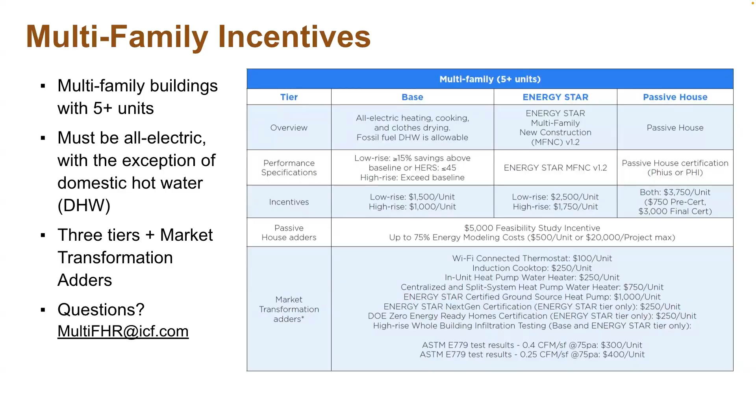So I couldn't be more excited about tonight's presentation. I've seen another version of it, so I know how powerful and thought-provoking it is, and that's why we're so excited to get it here at PH Mass as well. And I just wanted to say, I've been in PH Mass now for about 1.5 years, and it has been one of the pleasures of that work to work with Paul, to work with Ian, and the whole energy efficiency team at DOER. Sometimes I think bureaucrats can get a bad rap, and not always undeserved, right? But I think this team, DOER, the energy efficiency team in particular, is really defying those stereotypes.

There's a really forward-thinking spirit that is not just trying to make marginal gains in energy efficiency, but is thinking seriously about how we create a more affordable, more competitive Commonwealth. And I think you're going to see a great example of that tonight. I think that the work that Paul is presenting is really the start of an important shift in how we think about the value that Passive House and high performance building delivers, going beyond just the benefits to the occupants and thinking about the value that Passive House provides to developers, to utilities, to all ratepayers, to anyone interested in buying or renting a home, to everybody.

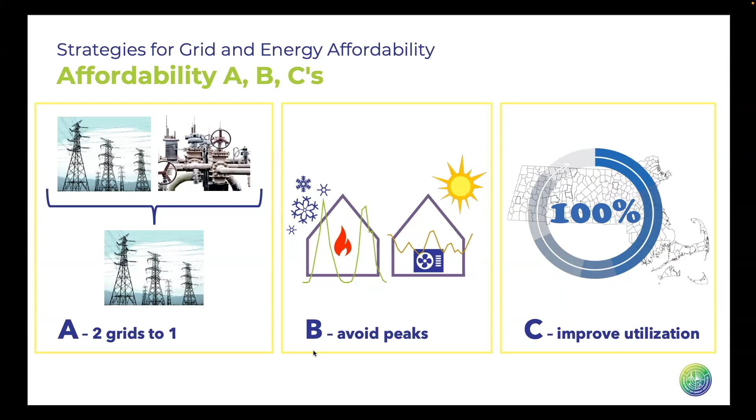So the kind of things it takes to make our grid more affordable, our energy more affordable, are really the ABCs. To go from 2 grids to 1 will make things more affordable. To avoid peaks in our grid, that will make things more affordable, and lower energy costs and to improve utilization. So about 60% of our energy cost is the cost of the wires and the cost of the pipes. So everything that you hear tonight would still make sense, even if our energy supply was free. So the key to affordability is not necessarily just more supply. It's these three things to make the cost of pipes and the cost of wires go down.

So passive house is a critical element to unlocking a better strategy for those ABCs. So I'd like to just take a moment and take a look at where Massachusetts stands in terms of passive house adoption and in terms of electrification.

So we have a terrific program in Massachusetts called MEPA. And the reason this is so useful to look at is because these are projects that are being permitted today. It captures many medium and large size projects in the state of Massachusetts, so it represents a really good sample. But also these are projects that are going to be built in 2 to 5 years, sometimes 10 years.

So when we look at what's being permitted through MEPA and the commitments being made as part of the MEPA process for these planned projects, we can get a good sense of what's coming, what's in the pipeline. So it's a forward-looking process. So we took a look back as far as 2020 so far. We're taking us back to 2018 right now.

And we found that passive house adoption in Massachusetts in our leading indicator with MEPA is just unbelievably strong, and it's accelerating. So as of end of 2025, so we're already 6 months into 2026, we had almost 20,000 multifamily passive house units committed through the MEPA process.

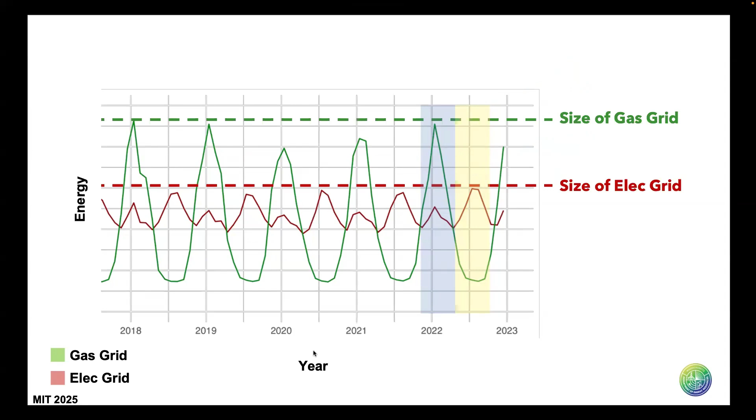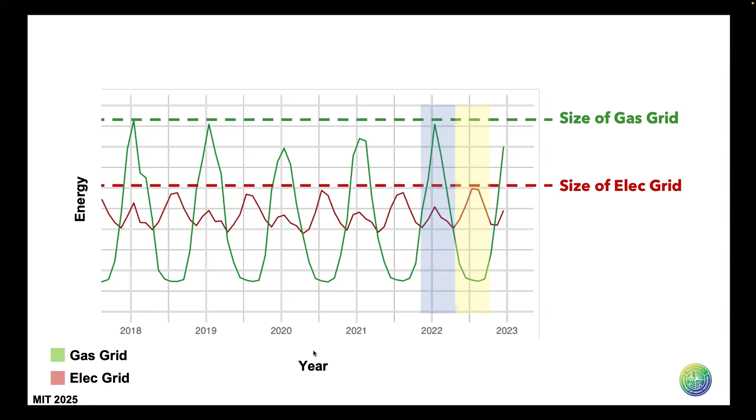And whether you're doing this at the national scale, a state scale, a regional scale, municipal scale, it is generally the case that the peak load that you experience in the winter there, that's the size of the gas grid in whatever sample size you're looking at. And the peak load in the summer for the electric grid is about the size of the electric grid in whatever sample you're looking at, again, whether it's nation, state, or city. So just isolating now 1 year and getting rid of those other multiple years. So just pay attention to those 3 points.

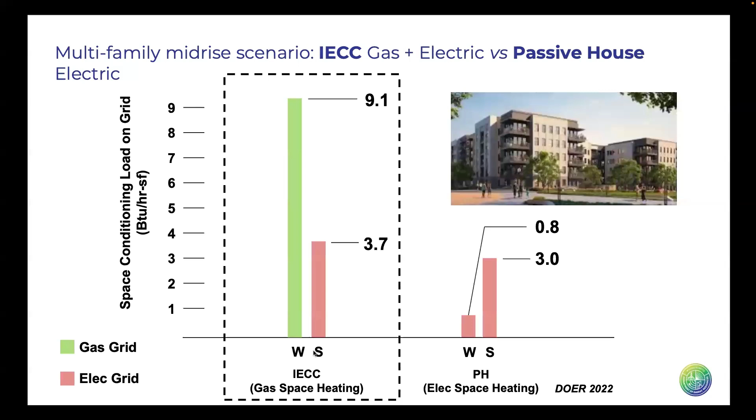And what I like to do is I have a new building. So I'm superimposing these peak loads on our grids, plural. So let's take the IECC heated with gas, right? The 9 and the 3.7. If we did that, what that requires is that we expand the gas grid by 9.1 for the winter. And we have to expand the electric grid in the summer by 3.7. So that's the 2 peaks that you see there.

So when we build with gas, if our go-to to save the electric grid is to build with gas, we see that that's not a great strategy, right? If we build with gas, we're having to expand two grids. Okay, so don't forget the gas grid in all this equation. Now let's go back to what we had for our passive house peaks and superimpose that. So that's what I have on the right side now.

So now this is showing what's happening in the summer, just breaking this up a little bit. So what would happen is in the summer, I have to expand the electric grid to accommodate that summer growth by 3. But that number is smaller than the IECC built to gas. So already you're seeing that when we go from IECC gas to passive house all electric, the expansion required on the electric grid is smaller. We're not doing ourselves any good by sticking with gas. Now what happens in the wintertime?

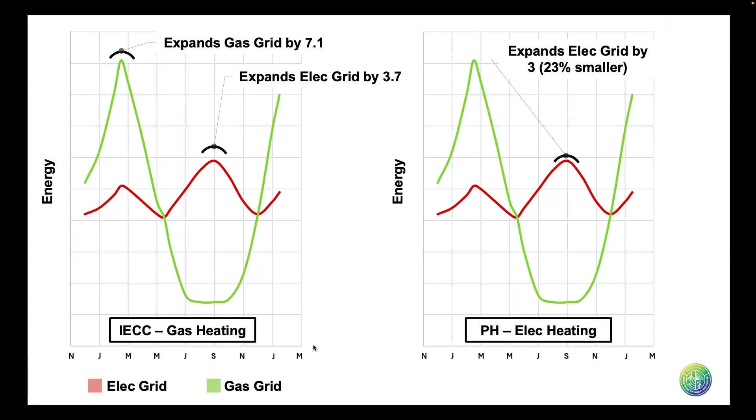In the wintertime, we're not expanding the gas grid because we're not using it. And we are expanding the electric grid in the wintertime a small amount, but that actually helps us because that's improving the utilization of the already existing electric grid. So we're using the electric grid already built for the summer more in the winter. That's going to make costs go down.

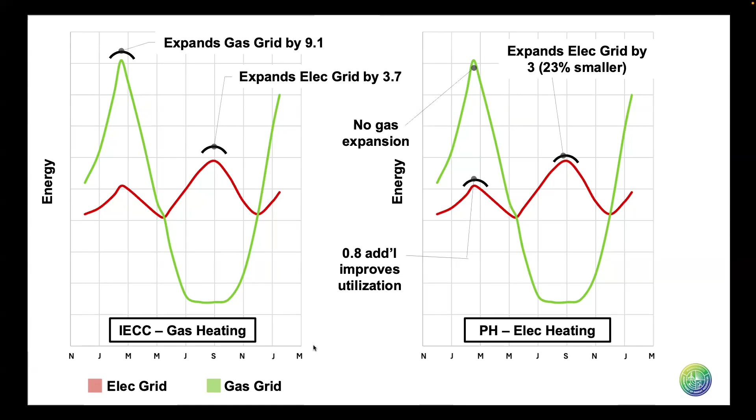So now if we were to project the IECC gas strategy, this is what's being done in many parts of the US. If we were to project that for thousands of buildings onto our grid, what would happen? We'd have a scenario that we call Twin Peaks. So we have to build our gas grid out significantly. We have to build our electric grid out significantly. We have 2 grids. The utilization of both grids is getting worse. So that's basically the maximum cost way to do things. So if you're looking for affordability, IECC with gas is not the right solution.

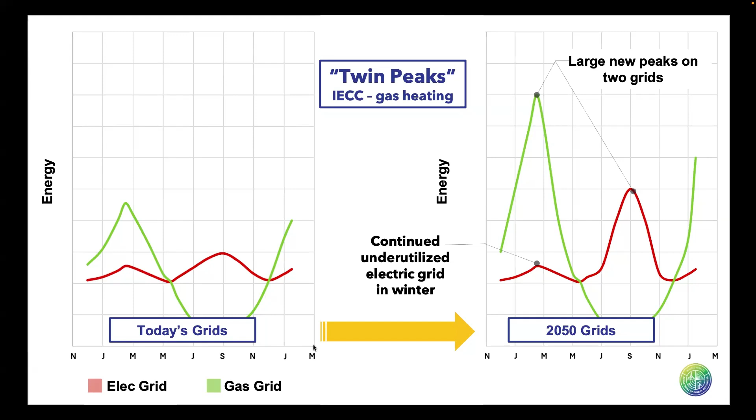Now, if we do the same projection, thousands of passive house, all electric space heating, what does that look like? The grid in the summer will go up. It'll go up by a smaller amount. So the growth on the electric grid will be smaller than it was in the other scenario. And then we're going to grow that use in the winter, which is, again, a good thing. And we're going to avoid growth of our gas grid.

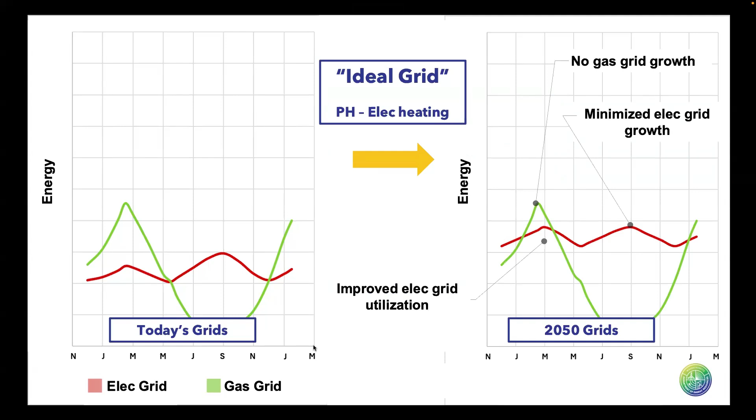So how are we doing on our affordability ABCs? We see that Twin Peaks is no, no, no across the board. It is the least affordable way to do our grid and to approach affordability of energy. And passive house, ideal grid, is meeting all of those strategies of ABC very nicely.

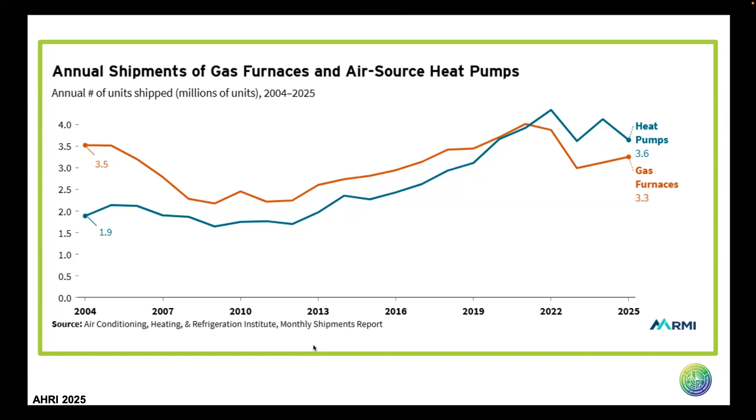Okay, so that's IECC with gas. That's the kind of go-to business as usual in many parts of the country. But we are seeing a new business as usual in many parts of the country as well. The last few years there have been more sales of heat pumps for space heating than fossil fuels for space heating, if you look at all the national data. And that means that we have a new business as usual, which is standard IECC codes, but instead of using gas for space heating, we're using electric for space heating, sticking with the IECC code.

So what happens if we look at other building types? That ×4 larger winter peak for space heating is what you see for multifamily. For non-residential, it can be even worse. If you look at the same stuff for the building use of schools, it can be almost ×10. So it's really not a great strategy if your goal is affordability.

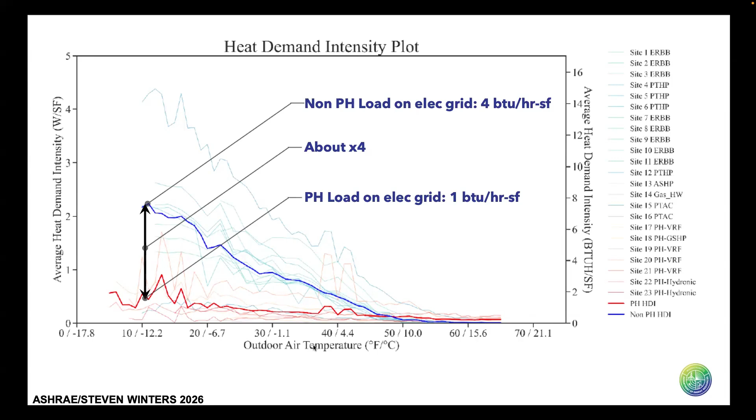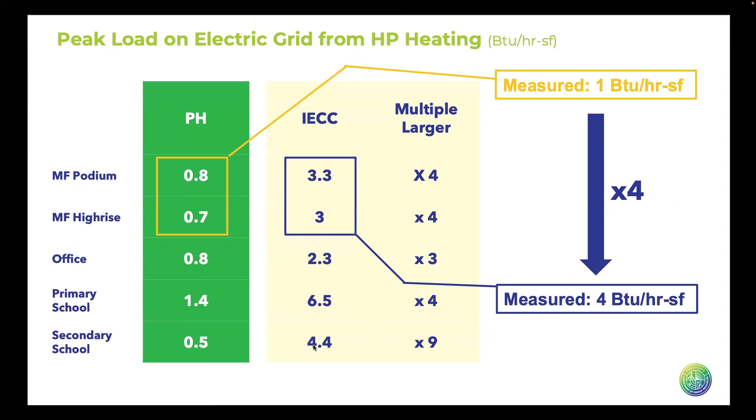If I convert those y-axis units to load on grid, the numbers I would get would be 4 BTUs per hour per square foot and 1 BTU per hour per square foot for our non-passive house and passive house scenarios. And then if I go back and take a look at my table here, my modeled passive house load on grid for heat pumps was 0.8 and 0.7. What was measured was 1. My modeled IECC was 3.3 and 3. What was measured was 4. So this modeled information has a lot of validation based on those many buildings measured over many years in a similar climate.

Okay, so we've been talking about load on the grid associated with space heating and space cooling. The reason I did that is because that's the thing that's changing. When we have a thermal code, we make that smaller, we crush it. We're also changing from gas to electric space heating in those scenarios. So that's why I'm focused on that. But the thing that the utilities care about as well is the overall load. So the load on the electric grid for all uses: lighting, pumps, fans, domestic hot water, et cetera. So let's take a look at that for load on the grid.

So this is a real project. We had a building project that is building housing, located in Massachusetts. We're going to call it Project X. Project X designed this whole project and then went for their grid interconnection work. And as part of that work, it was estimated that the load on the grid would be 11, the peak load that would occur in the winter. So the implication is that the grid in the neighborhood needs to accommodate a load of 11.

And normally we love going to 11.

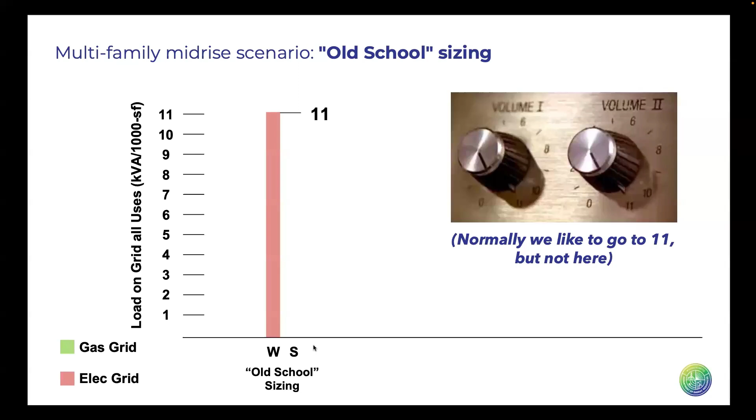Thank you, Gen X. In this case, going to 11 is not a good thing because it turns out that this housing project was actually designed and built to passive house standards. And the peak loads that were estimated from that process were 2/3 smaller than the 11. And so this is something that the local utility, National Grid, was interested in.

And they're looking at the landscape of this and thinking, if we have to build to 11, we have to upgrade all this stuff. It's going to cost a lot of money, but worse, it's going to take about a year for us to be able to interconnect your building. Now, if it's actually 3, we don't have to make all those upgrades, and it's going to take a lot less time to make the interconnection.

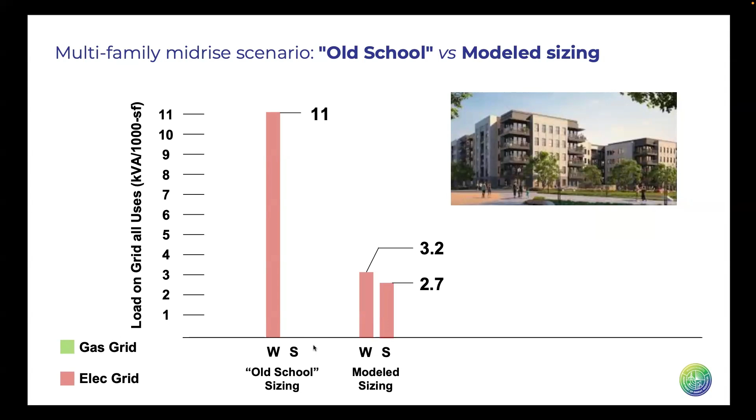So this verified those model results, and it verified that the interconnection now can go much faster. So if you want more housing sooner, build to passive house. If you want to slow down housing, build to not passive house. And that's measured in the field and validated.

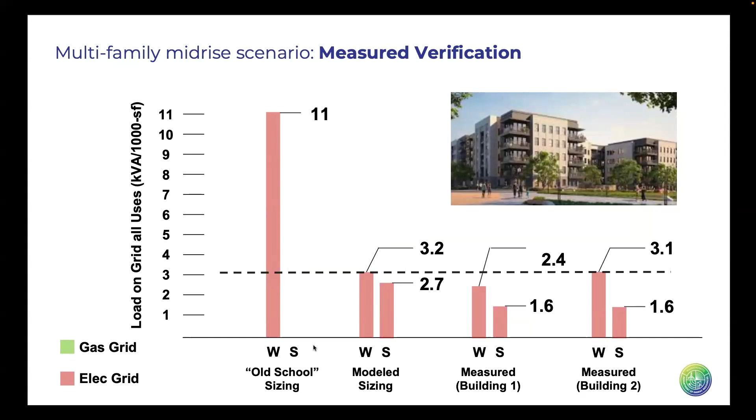I just want to take one more step into this because I think we can go even better. We can further accelerate housing production with passive house when we add demand response. So if we disaggregate that 3.2 and that 2.7, what do we see? What we find is that 2/3 of the peak, the summer and the winter, is attributable to space heating or space cooling, depending on your season, and domestic hot water production.

So we all know that if you live in a passive house, you can turn off the space heating or space cooling anytime in peak conditions, and the occupants would have no idea that you just turned the heat or cooling off for many hours, even days. So if you wanted to create a demand response program for a passive house, this would be a great thing to do, right? So we could turn the space heating off, the space cooling off at peak times and not disturb the occupants.

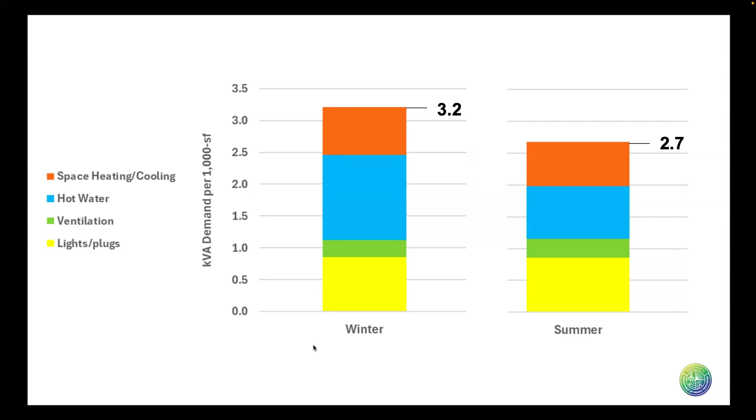Now couple that with demand response for water heating, which is the blue, which is something people have been working on for a while, that's adding storage. If you did that as a combination, you take out 2/3 of that peak load, bringing the peak load down to 1.1. So it's literally an order of magnitude smaller than the kind of peak loads that have been estimated based on many years of building construction, et cetera.

So we're entering a whole new era of how we can approach housing, how we can approach interconnection, and a way to accelerate housing that is critically needed now.

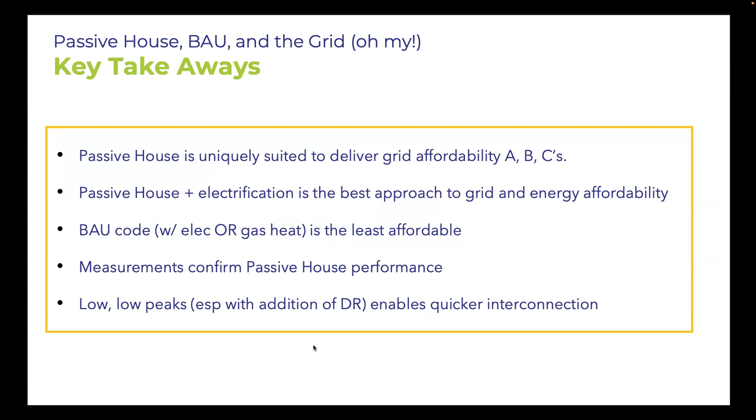Yeah, let me address the second question. I was having a hard time hearing the first, but we'll come back to that in a moment. So on the second one, you should really take a look at that ASHRAE paper that was done in this past winter journal, because they talk about exactly that. They show that the WUFI predicted peak is too low. And these results here, those 3.2, that 2.7, that's not what you get

out of WUFI. What they did was they took WUFI and they fixed a too-low assumption for water use and water use peaks, because that is sort of artificially low in WUFI, and they made it a realistic number. And then they calculated the average, the total, and they got that. So I think there's a fix for WUFI for you to have a good, representative, accurate picture of the peak that would also be consistent with measured peaks as well.

And on your first question, I'm sorry, I missed it. If you can just repeat it briefly. The question was pretty much, how do you see grid interaction in passive house projects? That was the short of it. We know all the histories with commercial buildings, but this is something that haunted my mind as you were presenting: it's already helping the peak load, but what if all of these passive house projects also interact with the grid to lower their demand when the grid is already at the peak?

Yeah, I think it's really important, and this is why I wanted to turn the conversation to peak loads. We always have these conversations about total annuals, which makes sense because we want those to be low. And then we turn the conversation to heating and cooling demand, which also makes sense, but that is an aggregate, an over-time measure. So we can justify passive house based on how much less energy it uses, how much less demand there is, better comfort, all that kind of stuff.

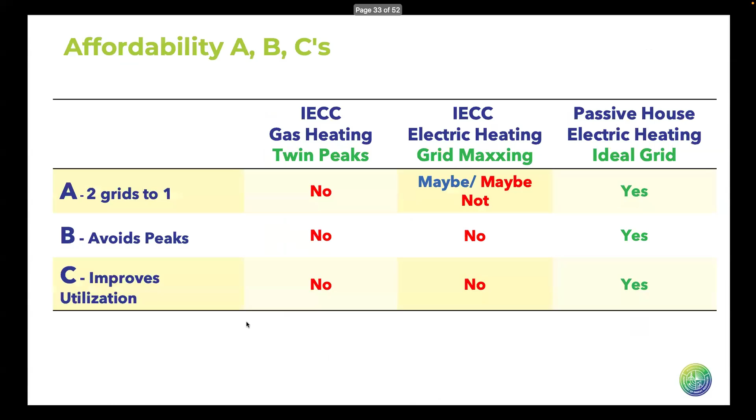This is a really easy one. Back from the beginning of your presentation, somebody was asking for clarifications about the metrics for number of dwelling units. Are they per year or cumulative? Okay, let's go back. It was before the electrification horror slide. Yeah.

So that is cumulative dwelling units. So this is showing that in the year 2020, there were about 2,000 dwelling units that committed to passive house when they were permitted in 2020. And then in 2021, there was an additional 1,000 or so. So it went up 1,000. And then in 2022, it went up another 3,000. So this is them added. This is a cumulative plot. So today we're at about 20,000.

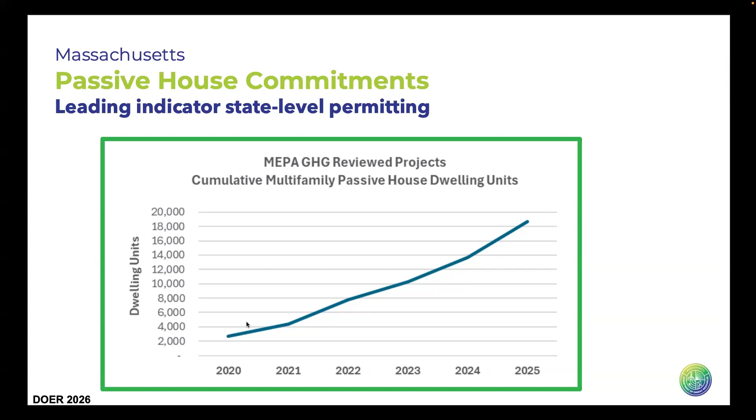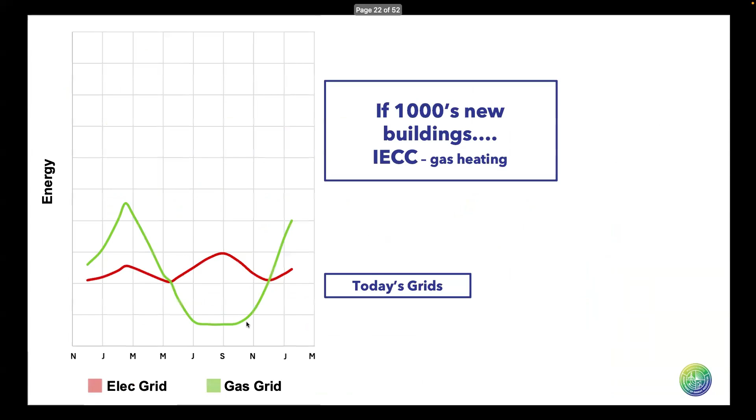Can you go back to the 11 slide for a little bit? With the 3 pairs? Yeah. This is a question, but also a challenge for the room a little bit, from an HVAC equipment side of things: you build these passive house buildings, and what you're showing here are the loads, but the actual connection to the building has to be a bit of the sum of the equipment and the nameplates, and as many of you know, there's issues with how small equipment goes, especially in Massachusetts with 1-to-1, how small a single compressor can go.

There's improvements there, but until we can centralize systems and take diversity of 20 suites on one system into account, we're really missing out on an advantage there of how to size things. With an independent hydronic fan coil, you can size that really small and have an economy of scale on compressors. So even that building at 3.2, the nameplate of everything in the building would be higher than that, and that becomes a challenge. And of course, our limitation is tenant billing rules with central systems.

And we're trying to talk to developers about how you can still centralize it, put it in the rent, beat the market that way. That's one of the big barriers here. And we're pushing our manufacturers to get smaller equipment, but the 1-to-1 is only gonna get so small, especially with heights of buildings. More of a challenge, but really try to push for central systems.

Yeah, there's a real parallel there, because for decades now, as passive house people, some of the designers have been doing this for a long time, there has been this tension, because the loads are very small. You're focused on your building, and the loads are very small, but the equipment sizing has not caught up with the idea that it's small now. Maybe because the equipment doesn't exist that small.

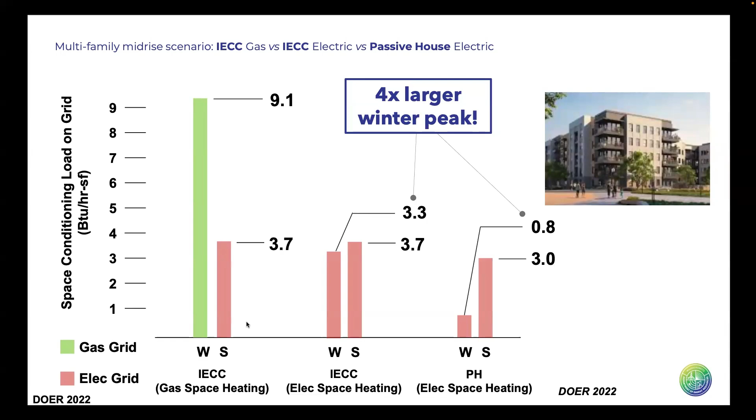Okay. There's a demand response question. So Pete Russ from HMFH Architects wondered if you could explain a little bit more about demand response. How would you turn off hot water or space heating/cooling at peak times without tenants being affected? Yeah, we'll go back to this so we can see visually the benefit.

What we're doing here, in a passive house, you can turn the space heating off, and the occupants simply wouldn't know for probably a day or so during the coldest day. Or you could turn the cooling off in a passive house, and the occupants wouldn't know for at least a day or so. So you could easily turn those off for 2 to 4 hours during peak times, and the occupants would have no idea.

And this is the same kind of program that we've been using for decades with lighting. The utility is connected to your lighting, and the utility actually turns the lights off for you. So in a supermarket, for example, they have 10 bays of lights, and during a demand response event, they turn off every other bay. So there's still light in there, it's just not as much. That's done for 2 hours, and the building owner is not doing this, the utility is doing this when they need to, and the building owner is then being paid for providing the ability of the utility to not have to run such high loads. That's how we do it.

So on the thermal side, you only do this with passive house. You definitely don't want to build an IECC building and turn your heating and cooling off; people are definitely going to know, it's going to get cold or hot fast. But this can be done in a passive house. So passive house opens up new opportunities for demand response that are enormous, that I think we all need to put our shoulders to and consider when we size our utilities.

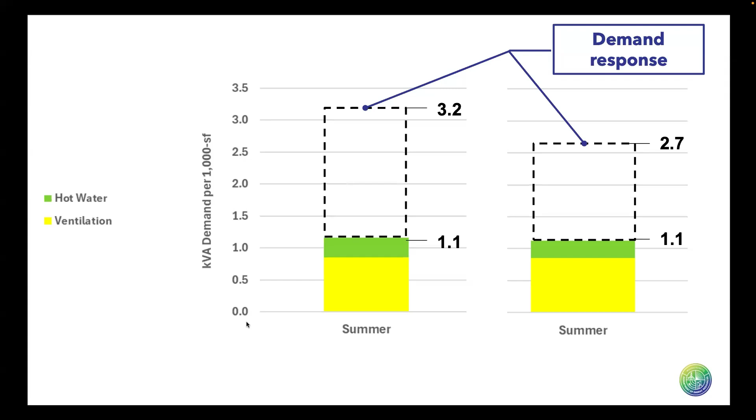I just want to go back to Katie's question on design, because I had similar experiences designing the sizes to the MEP, and the guy is not gonna sign it because it's a liability issue. It's a liability issue, they don't want to get sued. So I just want to go back to the question I had, that one thing that I figured, I'm curious to know what you all think, is it's the issue of methodology.

So two things. One, we are already dealing with the future data on the climate files, it's getting hotter or warmer, and we're at the question on the shifting. So using the future climate files to better understand the peaks and use another tool than WUFI Passive like IES or EQUEST to do the load calc, because I have the same finding that the MEP wants to go to Trace load calc and top it with 30% and then size it and put my work in the trash, because oversizing is gonna kill all of our savings.

So I think the issue of the liability could be solved with a better methodology, like run another model parallel to your WUFI Passive, or reference that article that we mentioned. That I think is gonna help us, because I'm also dealing with the same issue. If I do a little work, at the end the engineer of record needs to be comfortable to sign, and they won't.

Yeah, this is why National Grid and other utilities are really interested in measuring all these things, because these models just go around in circles after a while. But if you measure it, you have dozens of buildings measured, you can have a very high confidence that instead of being 11, depending on how much you want to sharpen the pencil, maybe go to 4. It doesn't have to be 3.2. But that's not 11. So that's why measuring it is so critical.